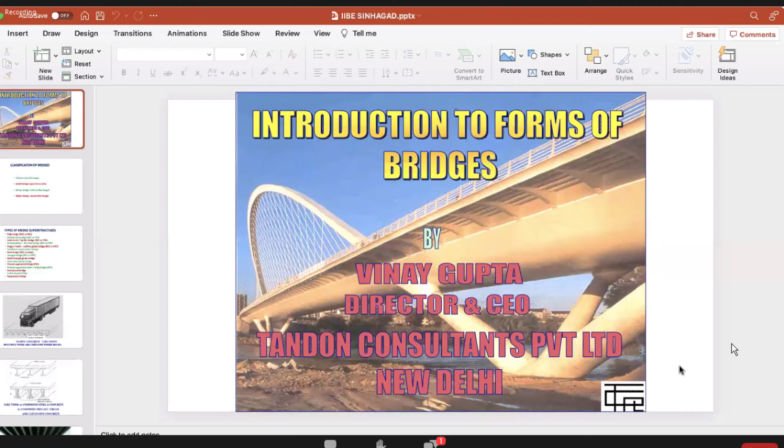To our budding engineers from Sinhagad College and other colleges, the faculty, and other audience today, let me tell you that bridges have one level of difference compared to buildings, in that bridges are always in public limelight. They are infrastructure projects. We have to be more sure about correctness and accuracy, especially when designing bridges, because if anything goes wrong, it is the public at large that is affected. And if something is very nice, it is you who get the appreciation from the politicians, the public, and everybody. So you always see the good side and the bad side of it.

The basic difference between bridges and buildings is that in buildings we may have 1,000 beams, but in a bridge we may have only one beam. In that one beam of a bridge, we go into lots and lots of detail, including creep, shrinkage, expansions, contractions. All those things may not be so carefully or so much in detail analyzed in buildings, where we have hundreds of thousands of beams and slabs. So there is some difference, as we go into a lot more intricacy when it comes to bridges.

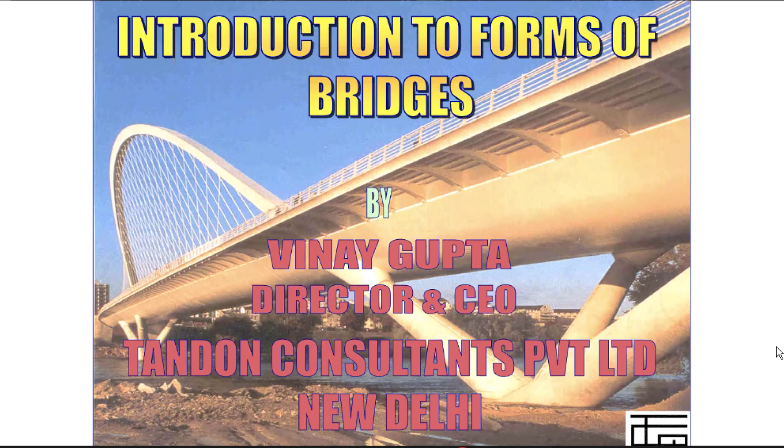All right, so first friends, let us see the basic classification of bridges as per Indian Roads Congress codes. Culverts have a span up to 6 meters. Small bridges have a span from 6 to 12 meters. Minor bridges are found when the length of the bridge is 12 to 60 meters, and major bridges are above 60 meters of total length.

The spans may be smaller. In fact, in the small bridges also, it is the length which is the criteria, not really the span. From 6 to 12 meters of length of the bridge will be called a small bridge.

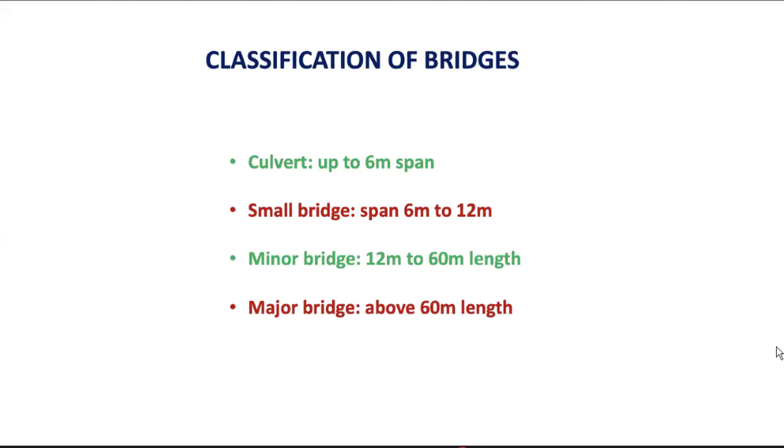Okay, what are the basic types of bridge superstructures these days, meaning as of now, latest? In the past, not so common now, but we do have some slab bridges, which are RCC or PSC slab, like a solid slab as in a building. You have a slab which may span from, let's say, 5 to 10 meters in the case of RCC, maybe 10 to 15 meters in the case of pre-stressed concrete. But somebody may wonder why not more than that.

You can have more than that, but the cost goes up. Material quantities increase heavily. Earthquake forces also increase because the inertial mass increases. So it's because of those practical reasons that we go for a solid slab only for spans between about 5 meters to 15 meters, RCC or pre-stressed concrete.

PSC means pre-stressed concrete. If we have spans larger than that, and if we still want a neat and clean looking slab, then we will go for something called a voided slab superstructure, which may be reinforced concrete or pre-stressed concrete. We will see some pictures of all these.

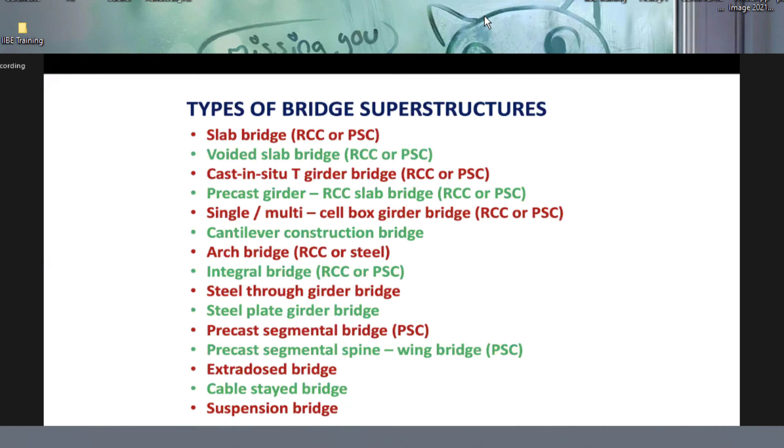If we have larger spans than 15 or 20 meters, then we can go for a cast-in-situ T-girder bridge. Cast-in-situ is one category, where you really put a shutter and cast it, which may have RCC T-beams or pre-stressed concrete T-beam slabs together.

Alternatively, it can be a precast girder topped with an RCC slab deck. The precast beam may be in RCC or pre-stressed concrete, but the slab will typically be in reinforced concrete, RCC.

We can have single or multi-cell box girder bridges, which again can be in RCC or PSC. We can have a cantilever construction bridge where we cannot put shuttering and the spans are large. So when shuttering cannot be placed and the span is large, we use cantilever construction. We will see some pictures as to how they are built up and constructed.

If you're an aesthetic lover, then we can have arch bridges for larger spans especially - they look very good, and can be in reinforced concrete or steel. We may have integral bridges. Integral means it is something like a building frame, where the superstructure is monolithically connected to the bridge without any pier cap and bearings. That becomes an integral bridge, which can also be RCC or PSC.

We can have a steel through girder bridge, like a truss bridge, which is an all open web structure, or we can have a steel plate girder bridge, which is a solid plate having a top flange, bottom flange, and a plate with stiffeners, etc.

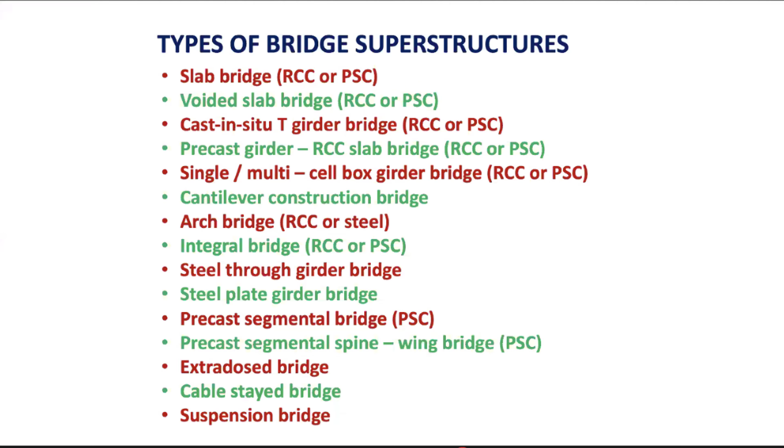We can have extradosed bridges. Here we talk of cable supported bridges, and in cable supported bridges there are three categories: one is extradosed, other is cable stayed, which you mostly hear of, and third is suspension bridge for larger and larger spans. In terms of span range, extradosed bridge is good for about 50 to 200 meters. Cable stayed bridge is good for about 200 meters to 1000 or 1200 meters. Suspension bridge is good for anywhere around 500 meters to 2000 meters span. And today we have a bridge with a clear span of 2 kilometers, or 2000 meters.

So this is a simple cast-in-situ T-section bridge. If you remove the webs from here, it becomes a slab bridge.

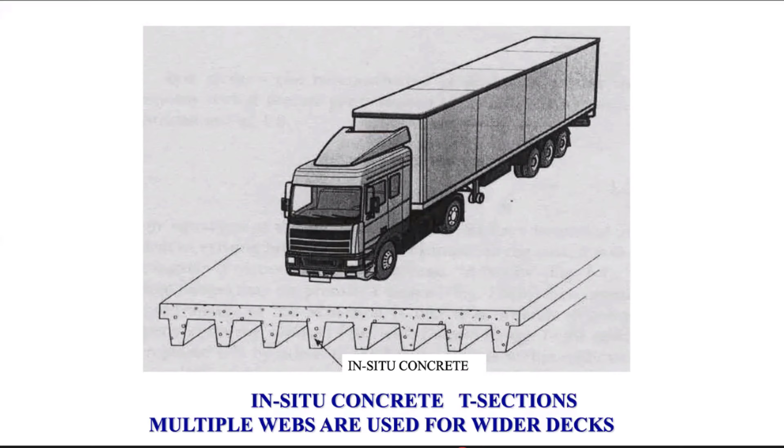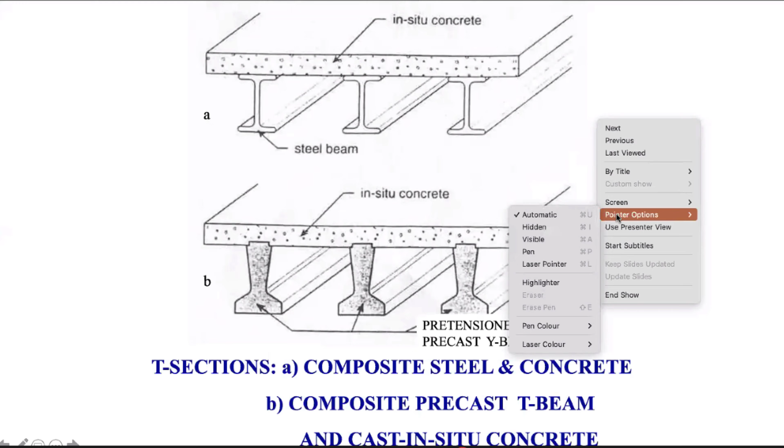This is precast concrete below. If you see below, it's precast pre-stressed concrete beams, topped with an in-situ deck slab, as I said, always an in-situ deck slab. And this is a steel beam bridge where you have I-girders or plate girders topped with an RCC deck slab.

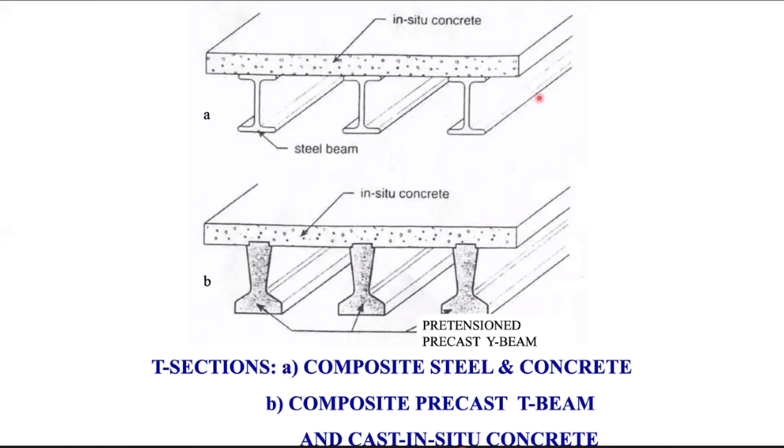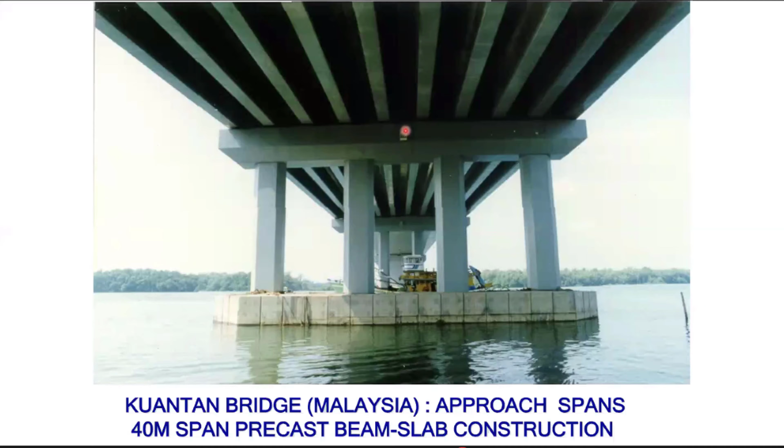So this is just a picture of a 40 meter span bridge wherein the pre-stressed girders are at a spacing of 2 meters transversely, and longitudinally they have a span which is each one 40 meters in the base here.

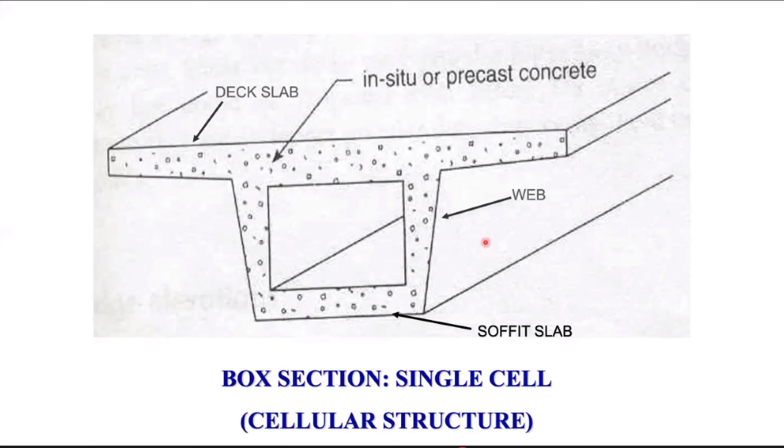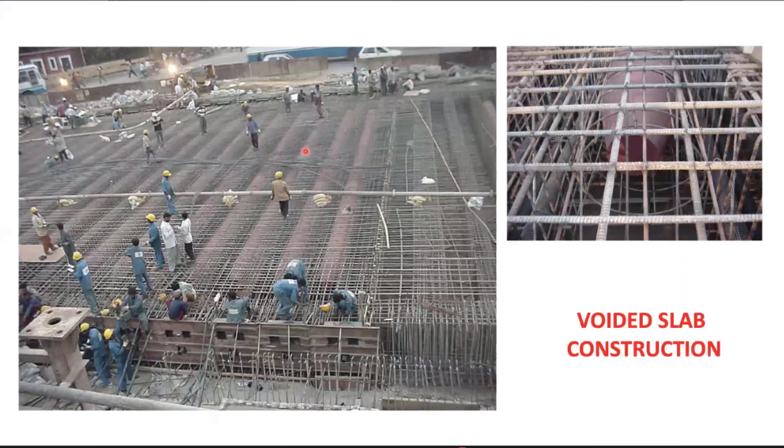Now we have a voided slab. In a voided slab, what happens is very similar to a solid slab or whatever shape we choose - for aesthetics we choose a lip shape - and we create holes like this to reduce the concrete quantity and the weight of the structure with the help of something called void formers. These are the void formers: metallic pipe type of things sealed at the ends like this, and they are placed in the concrete shuttering after placing the reinforcement and other things, and held tight with the help of some anchors so that they don't float when the concrete is wet, because concrete exerts a hydrostatic pressure. Once we do all this, pour the concrete, pre-stress if there's pre-stressing, or just RCC, whatever it is, it becomes a lighter structure by approximately 20% of weight for the given depth.

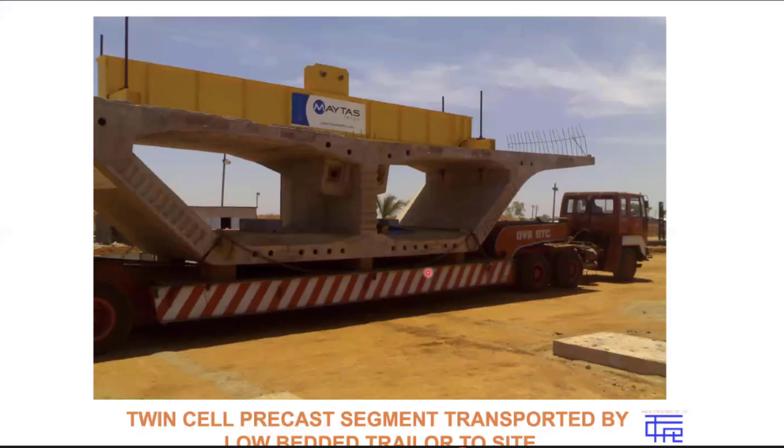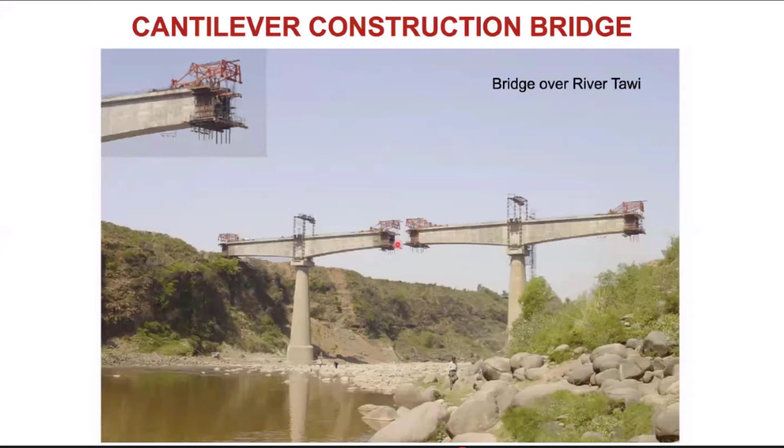Thereafter, we erect this kind of a formwork traveler, one on the right side, one on the left side, for a cantilever construction. With that formwork traveler, we cast in situ or precast, whatever we do, one segment of normally about 3 meters, slightly more or slightly less. Then we pre-stress it. Thereafter, we cast the next segment by moving the formwork traveler away from the center, and we do the pre-stressing at every stage. Once it reaches the center, we put a hanging shutter, put reinforcement, pour concrete, and the job is done.

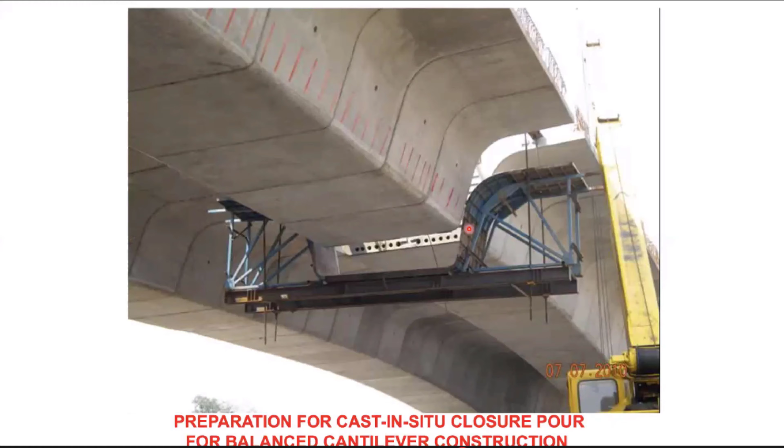Now, about the arch, if you have studied this in your colleges, you will know that an arch takes the vertical loads through a flow process of forces or the stresses as membrane forces. Membrane means it forms two components of the vertical load, along the arch and perpendicular to it, and they start getting balanced with each other. So finally, what is left over in the arch rib is only compression, axial compression. As a result, the arch becomes lighter, cheaper, and of course aesthetic at the same time.

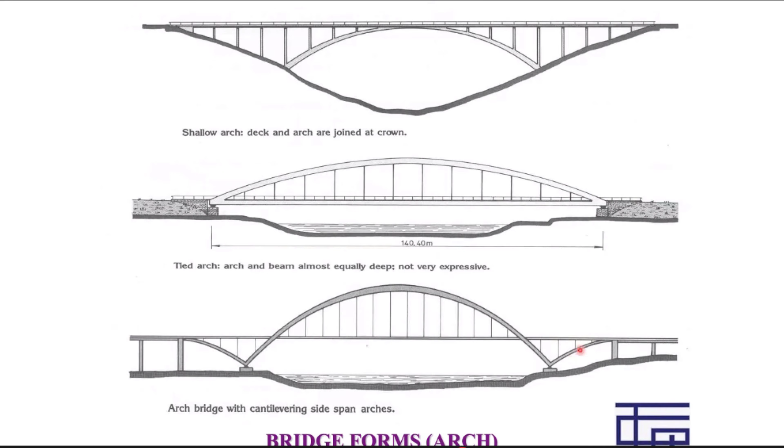This is a structure on the border between Singapore and Malaysia, a series of arches. What they have done is made the central arch large in span, and as you go towards the shore, with 20 to 30 arches, it goes on reducing in span. I know the designers have to work harder to design so many spans of different lengths, but the advantage is aesthetic. It looks very nice to have varying span lengths, lesser towards the shore and more towards the middle.

This is an arch bridge that we designed and was constructed by a contractor in Himachal Pradesh, with a span of 120 meters. It has a deck hanging from the arch, and this river is so turbulent that no shuttering could be placed. So this entire arch was constructed by the cantilever construction method from either side. Once the arch was completed, permanent suspenders were put to suspend the shutter, then the concrete was cast and the shutter removed. The suspenders remain.

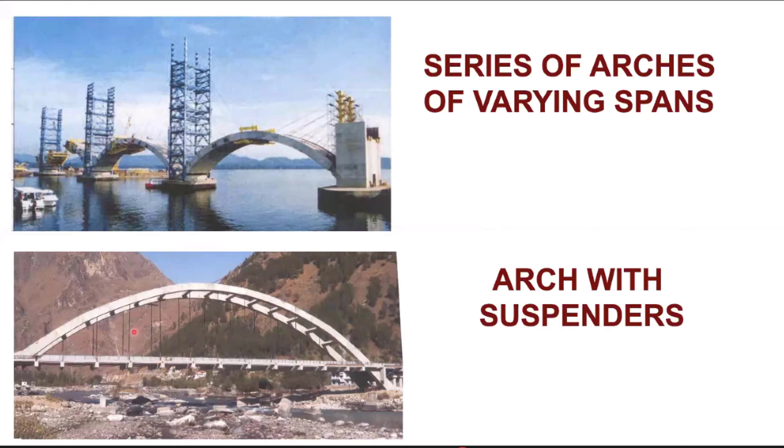Look at this very aesthetic masterpiece. It's a bridge in UK, the Gateshead Millennium Bridge, over the River Tyne, with a span of 105 meters. It has been designed and constructed such that the entire manufacturing of this arch, with a total weight of 800 tons of steel, was done off the shore somewhere else. The entire thing was brought on barges, on a barge of 3,200 ton capacity, to this place and fixed with the help of hydraulic pivots at each of the ends.

The advantage is that with hydraulic pivots, when ships have to pass, they lift the arch up, and when the ships have gone, they drop it back and pedestrians can move again. And of course, it looks excellent. During the night, it looked like a necklace of a princess with the lights reflecting from the water.

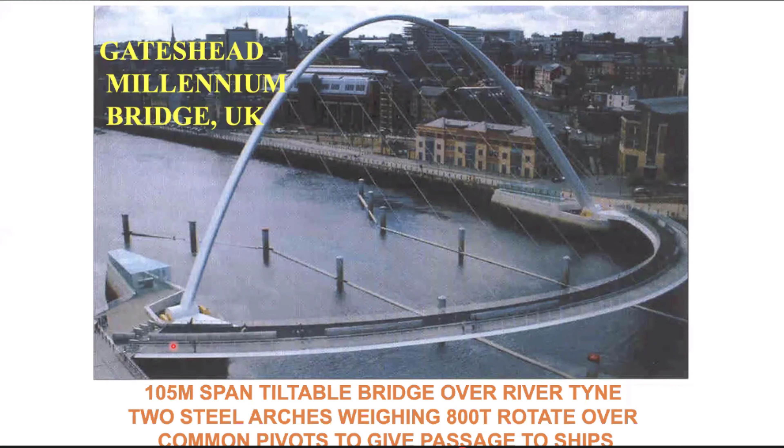Now we come to another form that we discussed, integral bridge. This is actually Kuala Lumpur International Airport, which we designed this bridge for a long time back. If you have a structure which is curved like this, and if you put this structure on two bearings transversely, then the structure being so sharply curved, it will fail in stability. If it topples, bearings will go into tension. So to avoid that, we have made these piers integral to the structure without any pier cap and bearing. It looks aesthetically also good. It avoids bearings, which are sometimes a source of problems, and it becomes stable as we want it to be. And this is a ramp, through which you go to the airport before you alight your car.

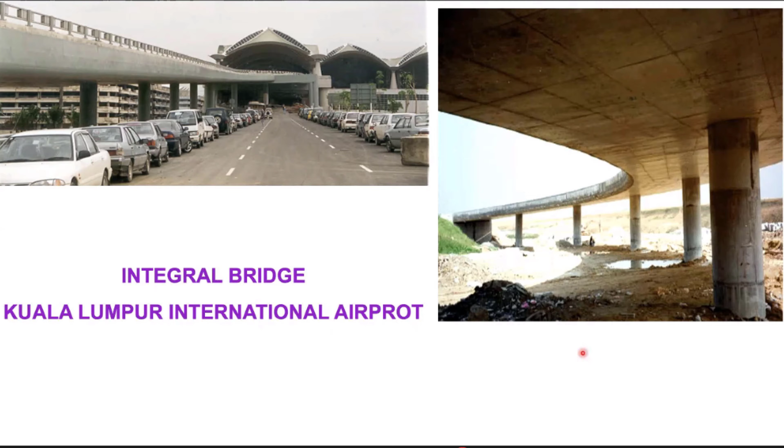Look at another interesting integral bridge. Now in this case, the piers, let's say if it's a single pier, is not at 90 degrees, it is at 20 degrees. So the pier is almost in the direction of the bridge, just missing it by 20 degrees. The skew, as we call it, is 70 degrees as opposed to 0. Now in these cases, when a bridge rests on the pier and bearings, it will have the tendency of lifting up, not toppling fully, but lifting up and creating problems with the bearing forces going negative. And other bearings will have excessive vertical load because of this balancing out situation. So we have made it integral with the help of multiple piers, 5 numbers of piers at each pier location, because the skew was a must due to traffic reasons.

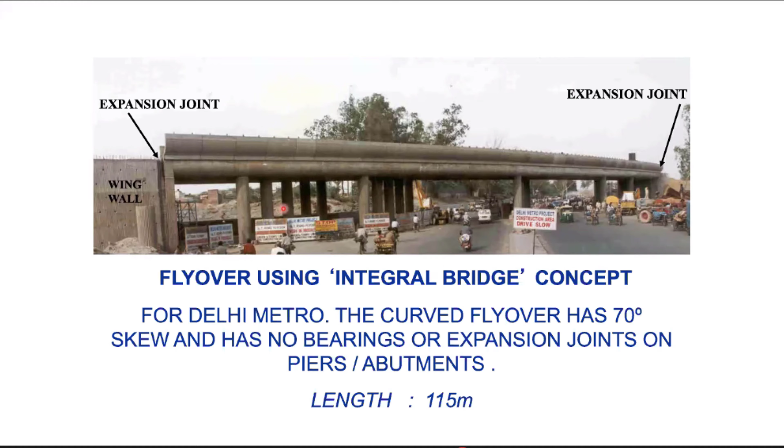Another thing we discussed is the steel through girder bridge. That means an open web bridge or a truss kind of bridge. This is the shape of a truss kind of bridge, very similar to what you design as trusses in your colleges for buildings etc. Sometimes we design even Vierendeel girders. This is not a Vierendeel girder, but it is a truss bridge. It can have a large depth, nearly about 1/10th or 1/12th or 1/15th of the span. Then you have bracings to take the shear.

Otherwise, you have a steel plate girder. In the steel plate girder, you have a solid plate with stiffeners, bottom flange, top flange, and on top of that you put a concrete slab which acts as a deck slab. Now the advantage is that this looks neater, cleaner, and better aesthetically, but it also cannot take too big spans. A truss girder could take even a span of 200 meters, but a steel plate girder will not be able to be designed for more than 50, 60, 70 or 80 meters. That's about the maximum. Beyond that, it becomes too expensive, too bulky, too wild.

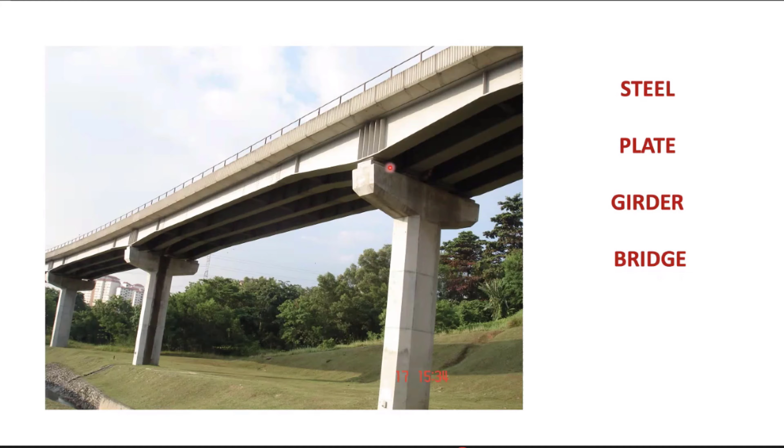All right, now we talk of precast segmental bridges. This is what we see day in and day out in our practical lives when we pass through the cities, for metro construction, for flyovers and all that. In your Pune also you have several of them. Mr. Lema is in charge of several precast segmental railway bridges, metro bridges.

So in precast segmental construction, what happens is that we cast concrete segments in a casting yard. In the process, the quality is also better because we have better control in the casting yard. It's like a factory in a way, producing the concrete segments for you. Then we bring those segments and assemble them for each span at a time. Assembly can be in two ways. One is underslung assembly, wherein you have a launching girder which is below and segments come on top of it, as you see in the right side picture. Here a portal lifts a segment from the railway trailer, places it on the launching girder, lifts the next one, places it, and assembles all the segments. After that, we apply epoxy resin, which is like epoxy glue, araldite type of thing, more like araldite only, and then you put some prestressing, etc.

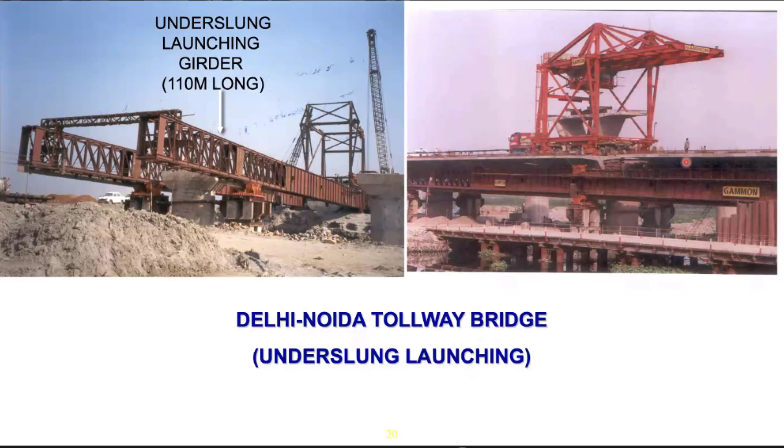The other method is to go for overhead assembly. In overhead, you have an overhead launching girder, and with this launching girder you suspend the segments with the help of wire ropes. You suspend the segments of a span. Thereafter, you do the same process of epoxy again in place.

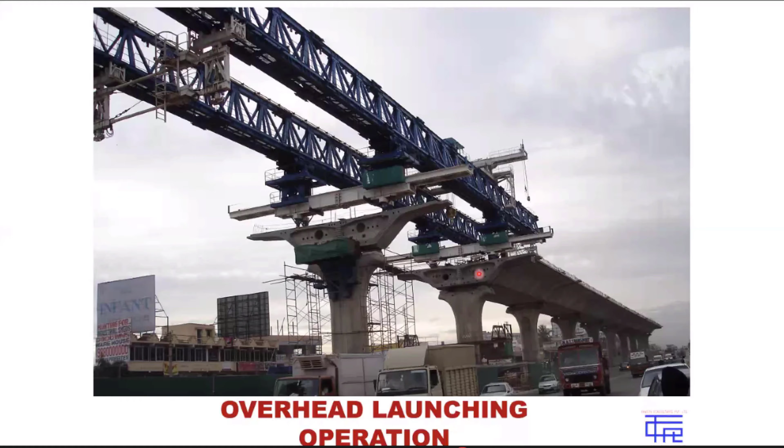This is one picture taken from a DMRC project done about 15, 17 years ago. It uses an overhead launching system because it's segmental - you see the joints every now and then. Each segment is about 2.5 to 3 meters long in this case, and at the joint, epoxy resin is applied.

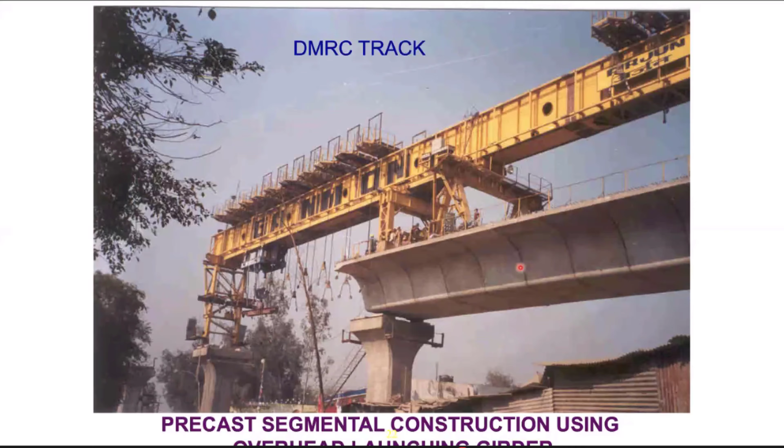Now an enhanced form of precast segmental construction even has transversely precast segments. The problem they had was that the width of the road amidst the traffic running there is not enough to handle a 16-meter wide segment, 3 meters long, traveling on those roads from casting yard to the actual site. So they decided to limit the width of the segment to only as much as the spine. After all the spine segments, 3 meters each, are placed pier to pier and pre-stressed, they bring in these transverse pieces - wings, as we call it - the spine-wing construction. These wings are brought in through cranes, and after applying concrete stitch or epoxy stitch, a transverse pre-stress is applied for it to become one.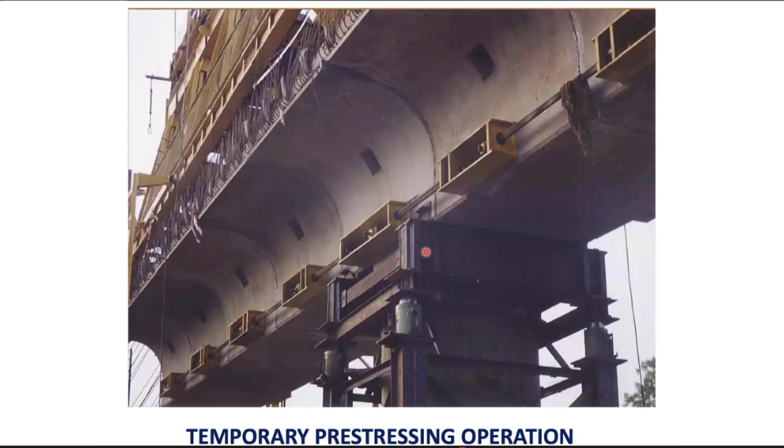Once you've applied the epoxy, you first apply a temporary pre-stress in such a way that it gives a more or less constant compressive stress across the joint of about 0.3 MPa, and keep it for 24 hours with the help of these kinds of systems. Thereafter, you apply the internal permanent pre-stress, which may be as high as 30, 40, or 50 times that 0.3 MPa, and remove the temporary pre-stressing arrangements at that stage.

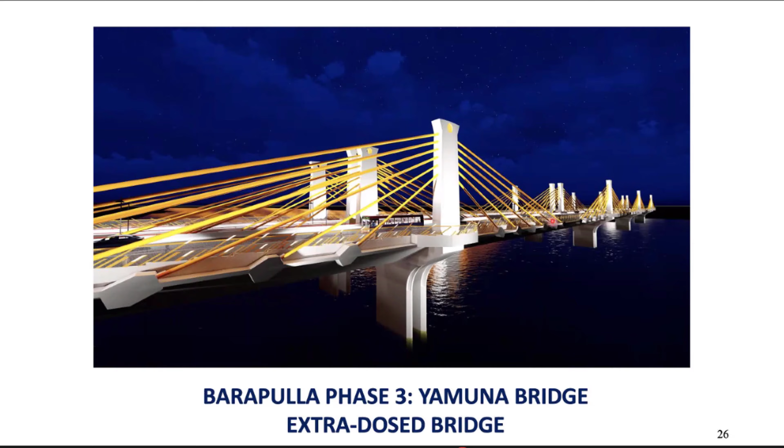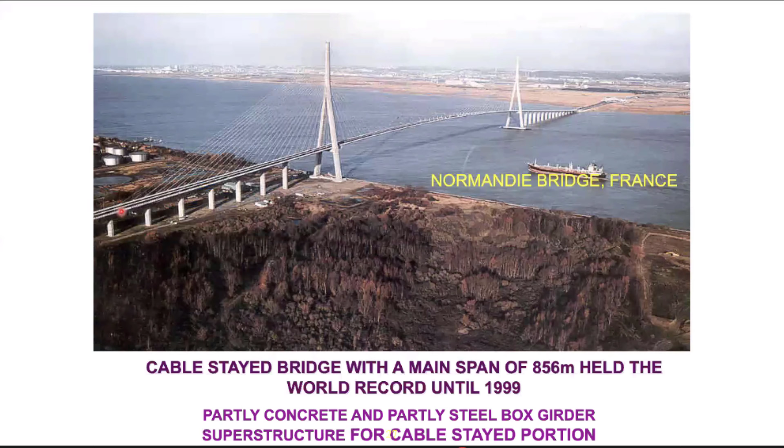How it is constructed is very simple - it's a cantilever construction where you first construct the pylon on the foundations. You then place one segment - if precast, then precast; if steel, then steel; if in situ, then in situ using a forward traveler. Place one segment, put the cable, place another segment, put the cable symmetrically on the other side also. You can do simultaneous construction of the other pylon till such time it meets, and there you put the central closure.

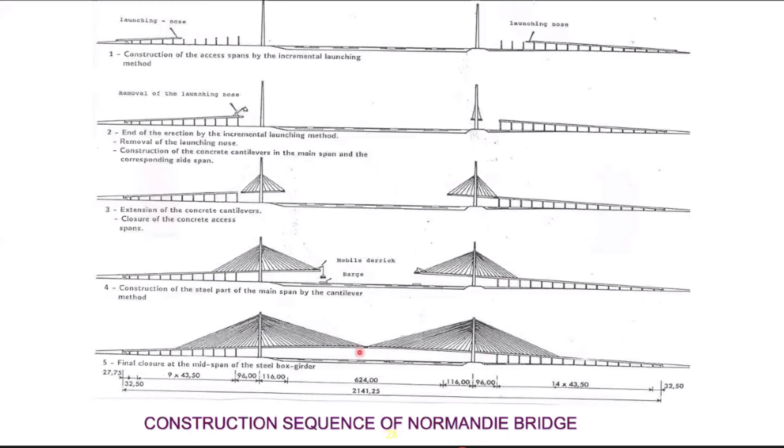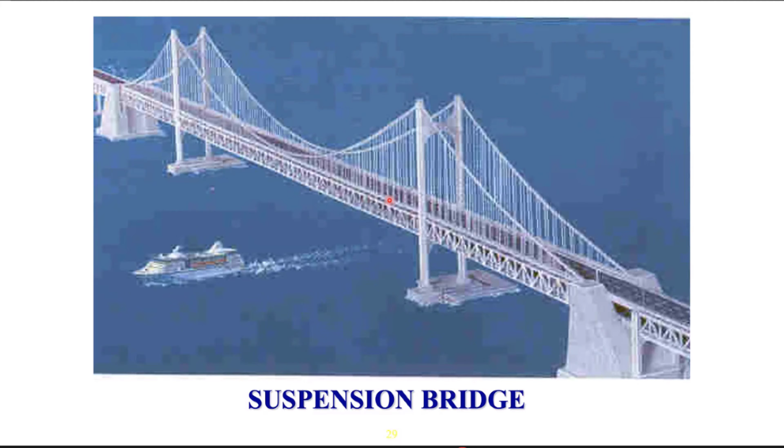This is an example of that bridge, which still holds the world record. It was constructed in 1999. It has a steel deck of 35 meters width, a span of 1991 meters precisely, and 300 meter tall steel pylons. It is in Akashi Strait in Kobe, Japan, called Akashi Kaikyo.

This span is about a kilometer, 2 kilometers, and a kilometer, so it's a 4 kilometer long bridge. The ropes, the cables, are also 4 kilometers in length, and each one has a weight of 40,000 tons.

The big challenge for the constructor was how to carry this cable across the seabed in the strait - strait meaning a narrow, somewhat shallow stream of water in the sea. A combined power of high capacity helicopters and high capacity barges working in the sea and above pulled these cables from one end to the other across the seabed, and that's how they managed to pull the 40,000 tons of weight.

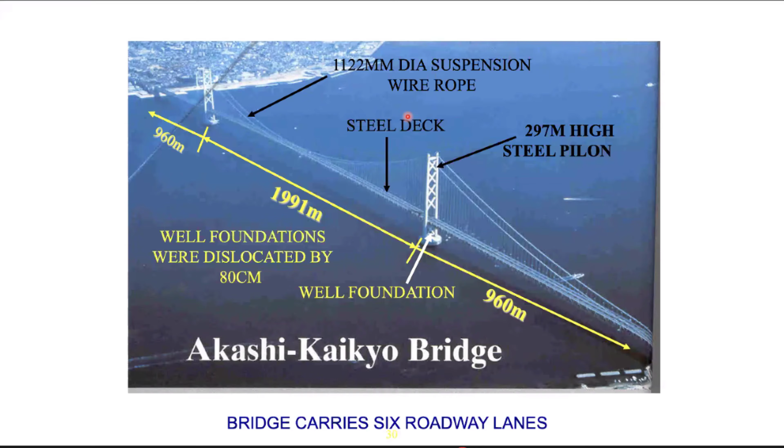Now we have seen superstructures, we go to foundations. We have open or spread footings, which you must have all seen in your colleges. We have pile foundations, which you must have also heard of, and we will see how they look. We also have well foundations, caisson foundations, and micro pile foundations, though these two are not so common in India, but they are also foundation forms. And we have piled raft foundation.

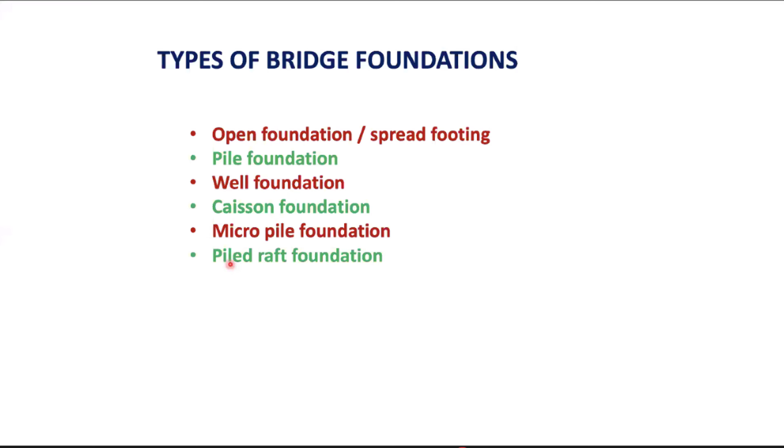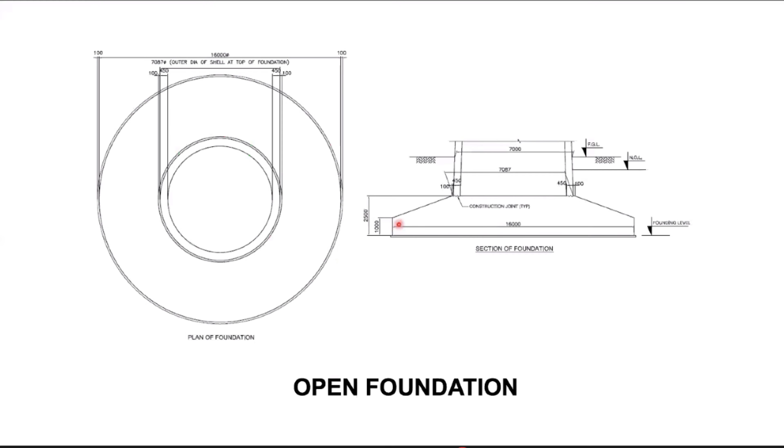Let's go down and see. An open foundation for, say, an annular pier of a bridge can have a shape like this, circular, square, whatever you choose based on economics and design. It may be horizontal here and inclined thereafter to reduce the concrete quantity, giving it a shape like this.

This shape is normally suitable when the width is large. Like in this case, it is for a chimney, where the width is almost 16 meters. In that case, for economics, it makes sense to taper this on both sides.

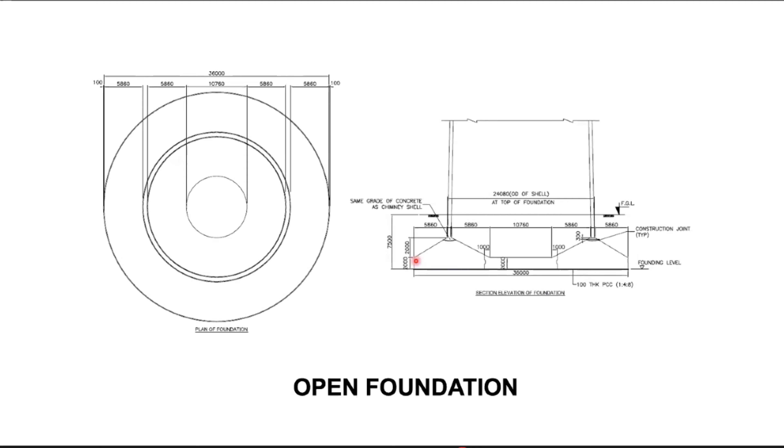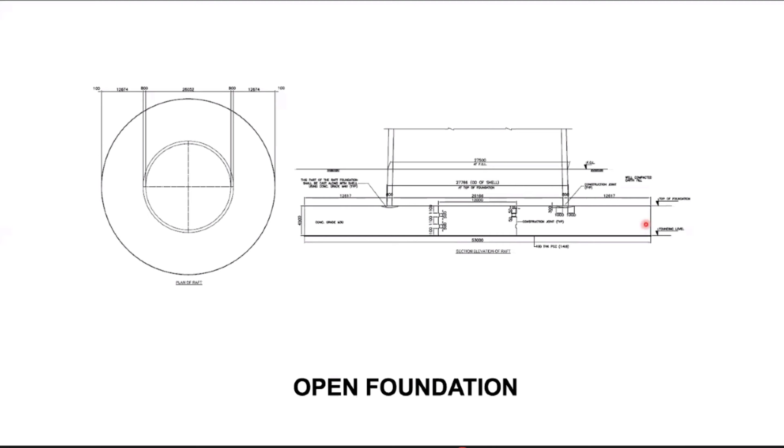There can be another type when you have a small diameter here - although in this case it is not small, it is 27 meters. But if it's a small diameter like 7, 8, or 10 meters, this can well be flat; it doesn't have to be always tapered. By making it flat, the advantage is the maximum thickness reduced and the reinforcement reduced, even though we used a larger quantity of concrete. It turned out cheaper in this case when we did the analysis.

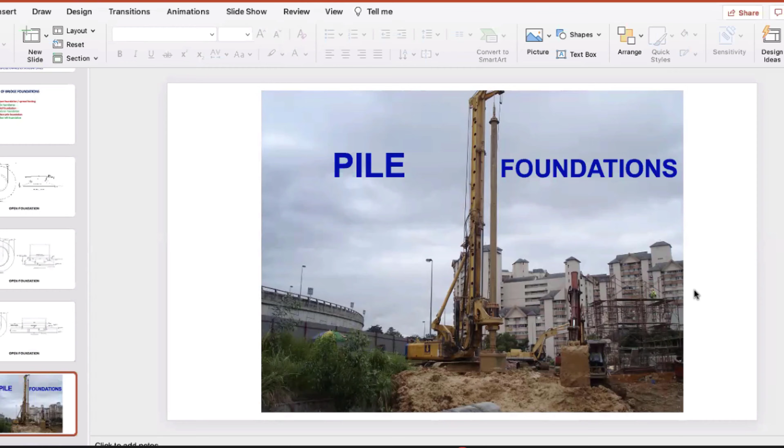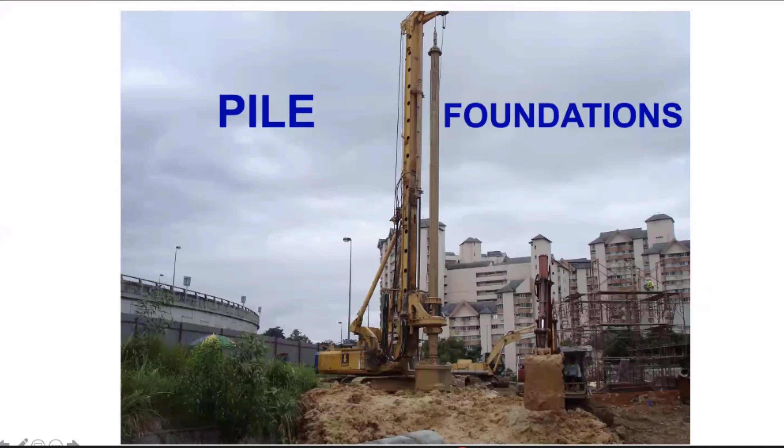In pile foundation, what happens is you have a hydraulic tool. Usually we use a hydraulic tool, which can rotate a shaft into the ground, and through the rotation it excavates the soil and picks it up through a bucket attached to grab the soil out. Likewise, you create a hole in the soil, wherein you have to place the reinforcement like this.

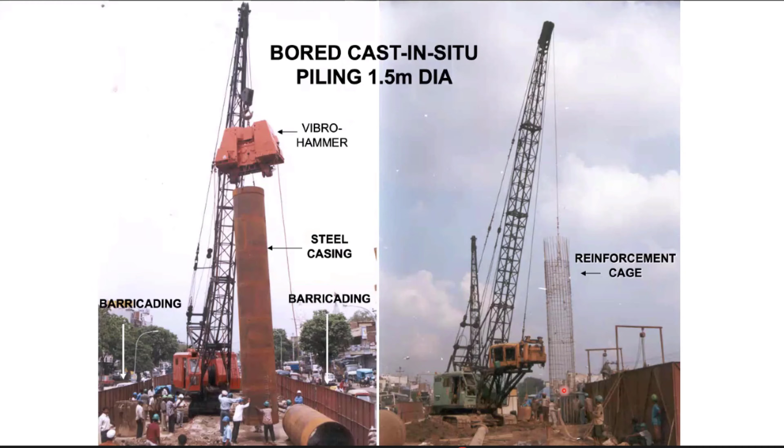You lower the reinforcement, and thereafter you put a tremie - I'll explain what tremie is - and through the tremie you pour concrete. Now this pile goes to 20 meters, 30 meters, 40 meters, 60 meters, even 80 meters in Cochin we have done, and outside people have done 120 meter deep piles also.

They can give you larger capacity from the soil, which may be weaker or whatever, especially when it is not rock - you do it more commonly in that case. But in Pune, Nagpur, and these places, metros are mostly made on piles, while where there's shallower rock up to 6 meters, they go for open foundations on the rock with high bearing capacity.

These piles give capacity through the side bond on the surface, and also from the end bearing. So end bearing and side friction - the side bond between the soil and the concrete - these two give you the capacity of a pile, which is of course higher.

Another concept, a slight refinement of a pile foundation, is the pile raft. In the pile raft, we do a soil-structure interaction analysis, wherein you take the soil as a spring, the pile as a very strong spring, and the raft as a structural member. Finding the interaction of all this, you find that about 20% of the load goes directly from the raft to the soil below, and the remaining 80% to the piles. So it becomes a piled raft foundation in your analysis.

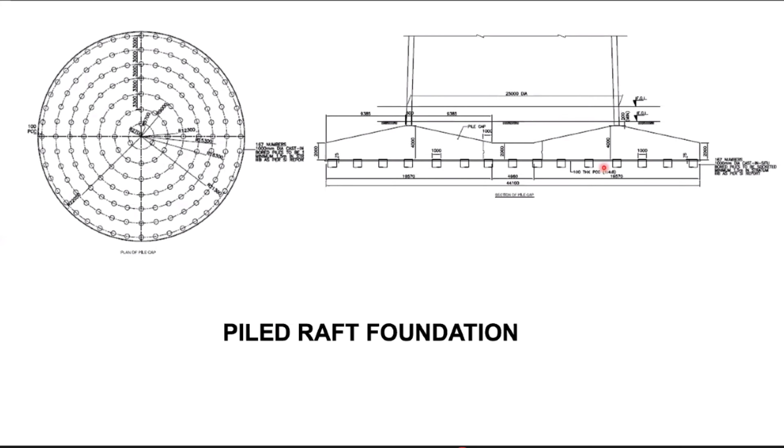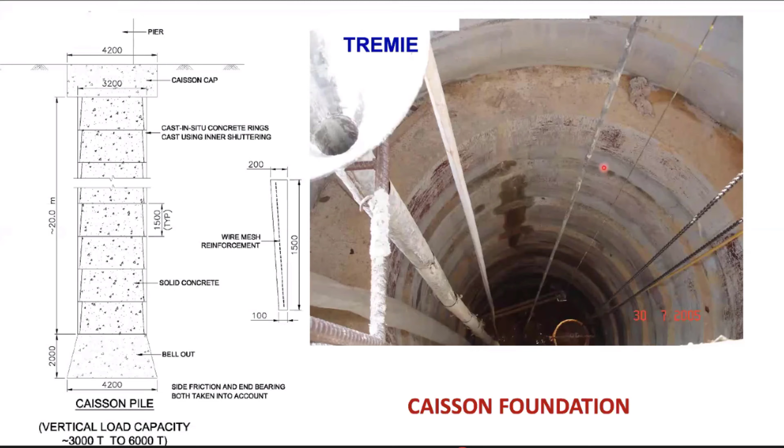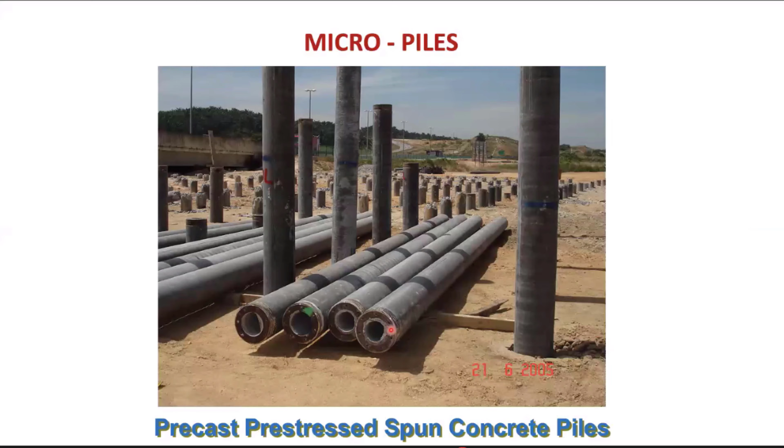We also have the caisson foundation. This technology is used in Malaysia, so I'll probably skip it, since it's not done in India. Then there are micropiles, which are ready-made piles available in 300 millimeter and 600 millimeter diameter. They're usually high-strength, M60, pre-stressed concrete, available in 12-meter long pieces. You bring them in and hammer them down. It's a compaction pile, so it gives you high capacity because you're hammering it down.

The advantage here is that it can take much larger vertical loads, and also, by virtue of having a large Z value—maybe 5, 10, or 15 meters diameter—it takes a lot of horizontal forces and the bending moments created from them, through the side resistance of the soil. So it's like a wide pile foundation that you're inserting into the ground.

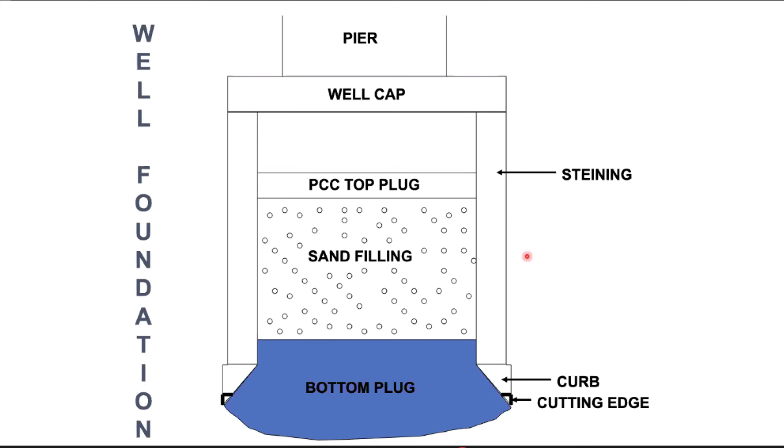This is a picture of the sinking of a well: every time you do some excavation, the well starts sinking, then you cast more steining, then again excavate inside, and the well keeps sinking, likewise.

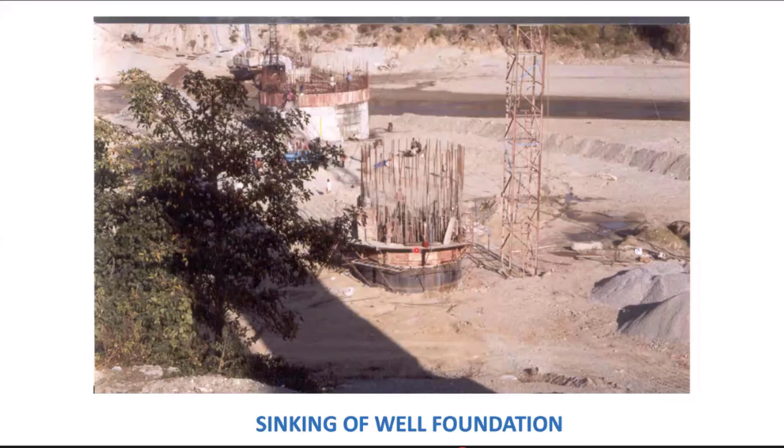Now we go to piers. Piers can be solid, which is what you see in Pune Metro, or annular, rectangular, or hollow. They can be solid or annular circular piers, or any other shape—rectangular, circular, or otherwise.

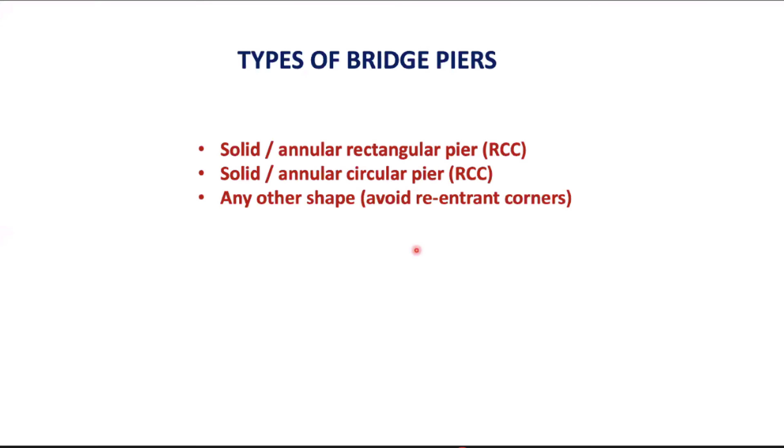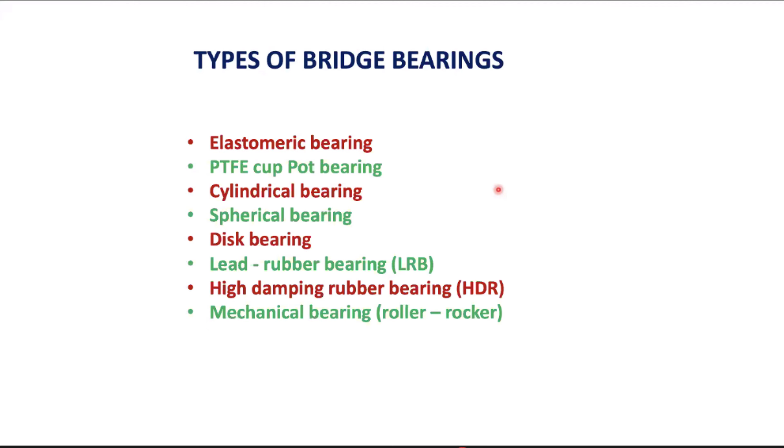Bridge bearings—the elastomeric bearings. Bearings are the elements placed between the superstructure and the pier cap, for the load to be transferred to the foundation finally. We have elastomeric bearings, PTFE cum pot bearings, rubber bearings, and mechanical bearings like roller and rocker, which railways use more.

In elastomeric bearings, you have an elastomer made of chloroprene, carbon black, and a few chemicals put together, forming a sheet. Inside that you have reinforcement of mild steel plates, and you vulcanize the entire thing at this temperature. You'll have the handout, so you can read it later—I may be rushing fast.

It becomes a slightly softer material than the hardest steel, and the elastomeric bearing works very well. It's fairly cheap—the cheapest form of bearing. The only thing is we should manufacture it properly. The next one is the PTFE cum pot bearing, which is very popular nowadays.

In the PTFE cum pot bearing, we have a bottom plate, which is anchored to the pedestals in over the pier cap. We have a top plate, which is anchored to the superstructure. Anchors are not shown. At the bottom of the top plate, which is mild steel, we have the stainless steel plate also there.

Below the stainless, coming onto the side, we have bottom plate and side walls, again circular in plan, and a piston which is also circular, and an elastomeric disc here, which is for transferring the load equally everywhere. Over the piston, there is a plate which is called saddle plate.

In the saddle plate, we have a small recess of 2.5 millimeters. In that recess, we put polytetrafluoroethylene, white material. The sliding between the top and bottom takes place between the PTFE and stainless steel that is here. So stainless steel and this mild steel is connected to superstructure, and this PTFE piston and the bottom one, called cylinder, and the elastomeric disc, are connected to substructure, and the sliding would take place along this mating line.

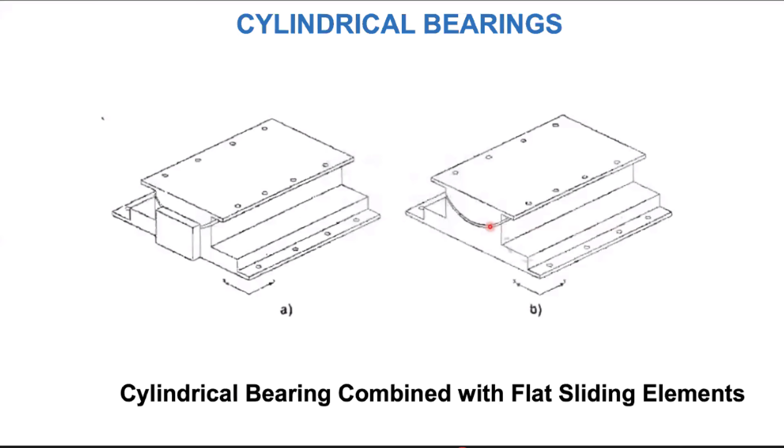And I think Mr. Jitendra Rathore is with us. He must be watching all this.

From Sanfield, there is another type of bearing, that is disc bearing. These bearings were used first time in India for Worli Bandra Sea Link in Mumbai. In this bearing, you have a disc of a material called polyurethane, which is a very high capacity material. For larger loads, this bearing is suitable because this requires a lesser area to transfer the load because it has a high capacity.

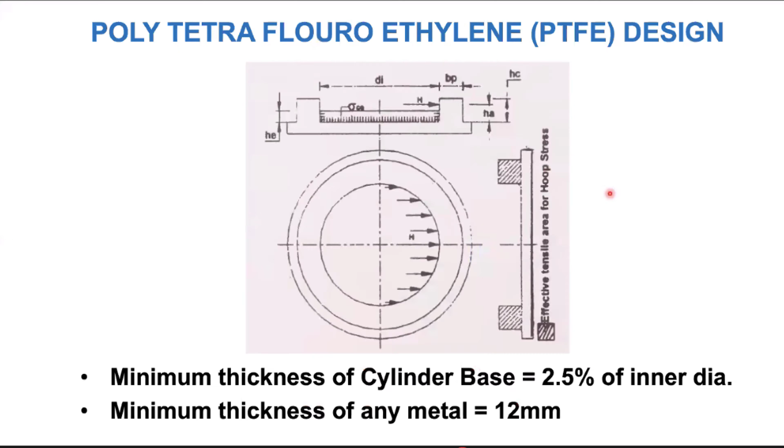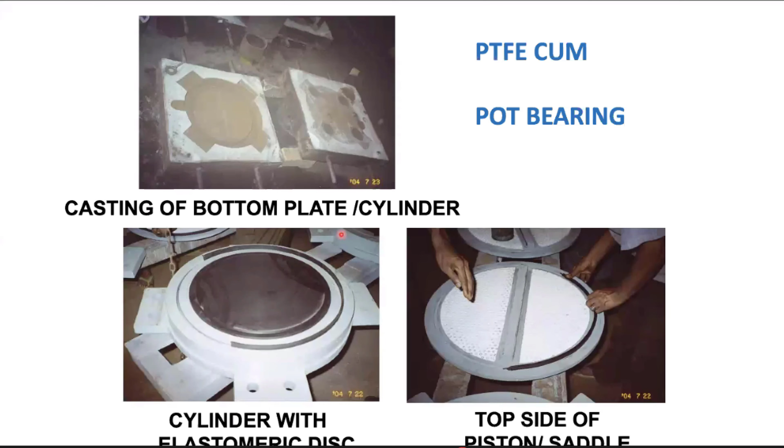In fact, if you go up and see here, elastomeric bearing will take a pressure of about 10 MPa. Pot bearing will take a pressure of about 25 to 30 MPa. And spherical bearing will take a pressure of about 30 to 45, 50 MPa. That is the difference. And this will take even more.

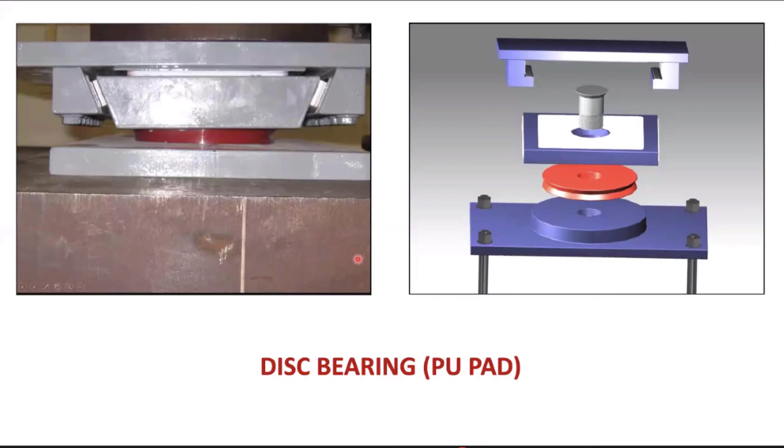I don't know how much. I have not gone into details of what load it can take, but only Bandra Sea Link bridge, being a large one, it is able to take those vertical loads.

So what we do is, we put this kind of high damping rubber as one material, which gives a damping effect and increases the time period of the structure. Or we use low damping rubber with a lead plug, which gives us a larger damping, meaning pushing the structure back to its position. Or we use just elastomeric bearing, which is a low damping material, which gives an enhancement of the natural time period of the structure, thereby reducing the earthquake forces experienced by the structure, even though the structure may be heavy.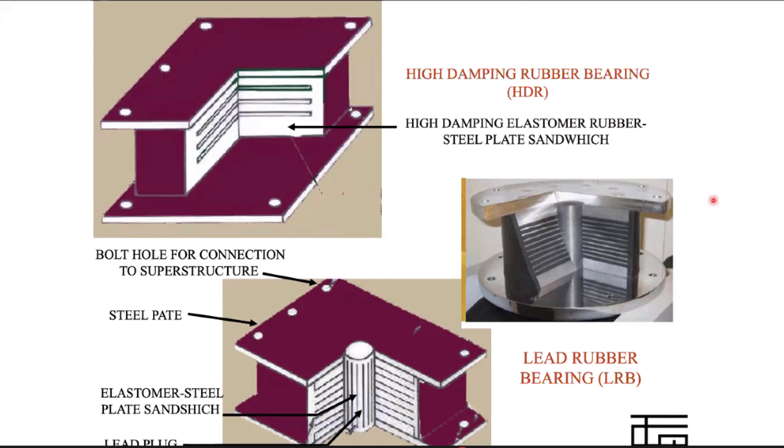Then I talked about mechanical bearings. These are more used in railways, less now in highway bridges. We have rollers, we have a saddle plate, we have a top plate, we have a bottom plate. This is anchored to substructure, this is anchored to superstructure, and this acts by movement.

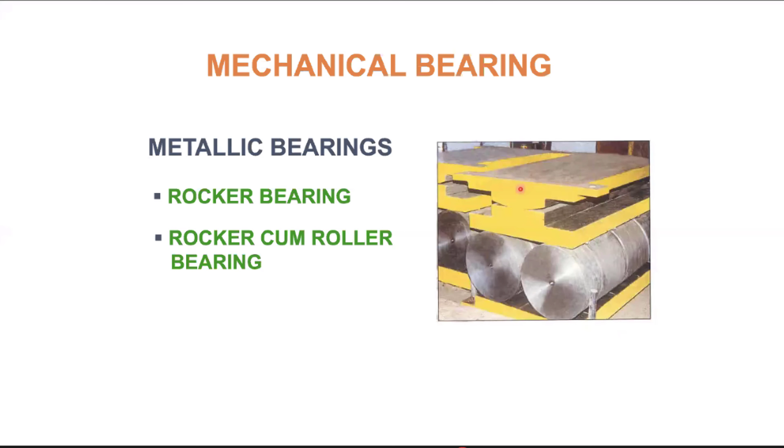Okay, now come to expansion joints. Where you have two adjoining spans provided with the gap, you can't have this gap permanently because you want the traffic to move on a smooth surface. So this expansion joint transits between the two adjoining surfaces of the deck slab of a bridge.

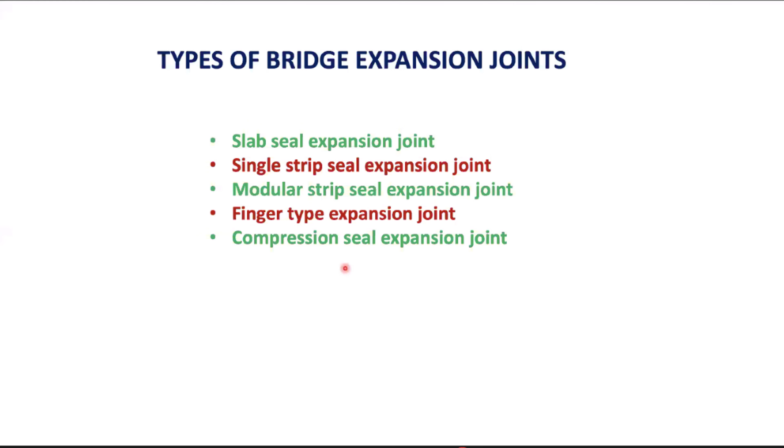So we have slab seal type, single strip seal expansion joint, modular strip seal, finger type, compression seal, and we'll see each one of them. This is the most common expansion joint nowadays, that is strip seal. In this, you have a metallic extrusion of a specific shape.

You have a very simple elastomeric seal like this, which can expand and contract, and at about 5,000 rupees a meter, it can take the loads and transfer the structure's movement.

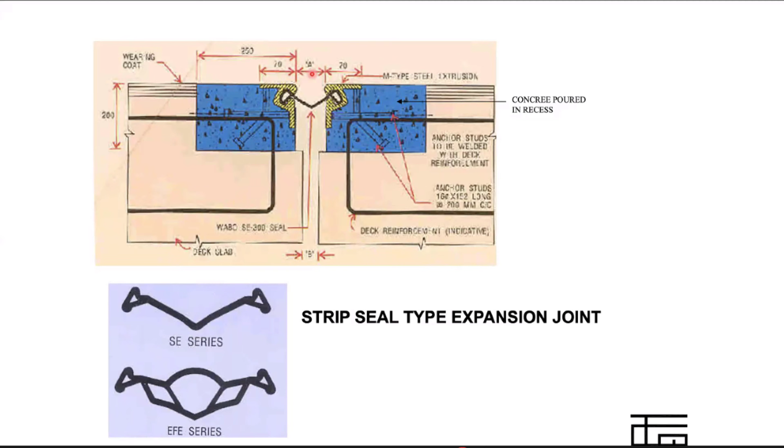When you have a larger movement, the limitation is that this movement, plus and minus together, due to expansion, contraction, temperature, shrinkage, creep etc., if it's up to 80 millimeters, this is fine. Otherwise, you have to go for a modular strip seal, which you can see the shape here.

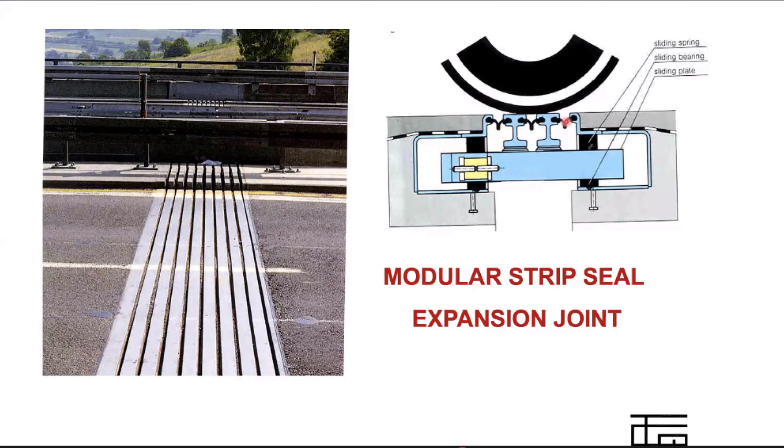Each of them can take 80 millimeters movement, plus and minus added together. So finally, you require a number of them depending on the length of the bridge that has to be bridged.

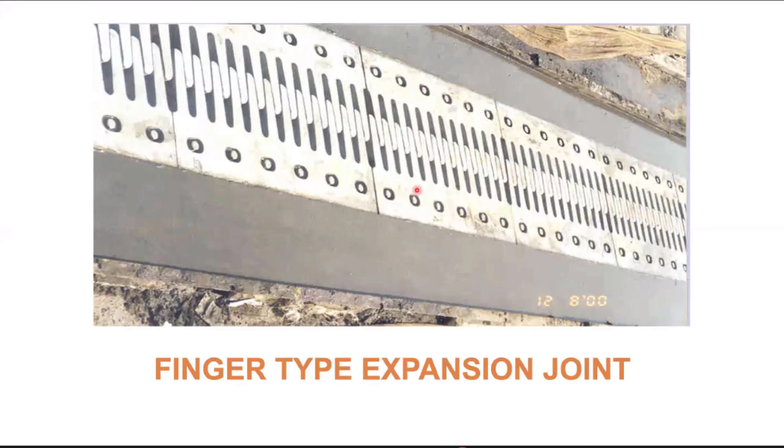In finger type, you have metallic fingers, as the name suggests, and they just bridge the gap so the vehicle can move over it without any problems. But the finger type expansion joint itself, being in metal, is a little prone to corrosion, so we have to worry about those parts in terms of durability.

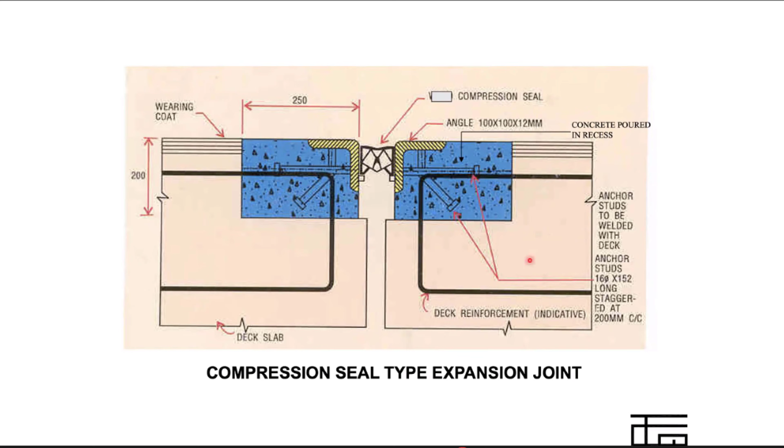We have box seal, or compression seal, wherein we have this kind of elastomeric box which can expand and contract. But looking at the shape itself, we can make out that this can't take very large movements. It can take movements plus and minus together only up to 40 millimeters.

Now we talk of reinforcement and pre-stressing. Reinforcement is passive reinforcement, whereas pre-stressing is active. Let me just check how many slides, because I should not be missing my slide. 60, okay, we have 5 more, fine. So I'll go to this.

In pre-stressing, what happens is you put some kind of metallic cable running along the tensile bending moment profile and stress these cables, locking them to the structure to give compression where we have tension on account of the bending moment.

Let's say if it's a 2-span beam with the supports, you have tension here, so you provide the pre-stressing here. You have tension there, provide the pre-stressing there. You have tension there, provide pre-stressing there.

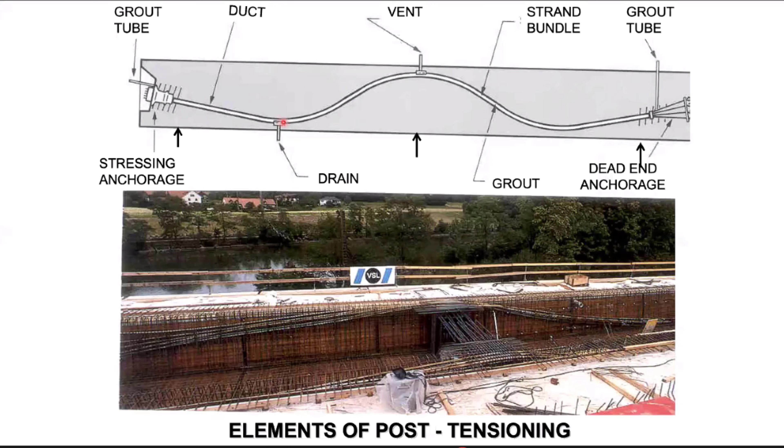But for doing this, we provide ducts that look something like this, metallic ducts or plastic ducts made of high-density polyethylene. In the ducts, we place pre-stressing hardware. Hardware means, first of all, we have the duct, which is placed in the concrete while casting, and after that, we bring in these pre-stressing strands.

Now here, you see, this is something called a cone, an anchorage cone, which looks something like this, and this is also placed till here where the concrete line is. After that, you put the pre-stressing cables.

Then you put the anchor head, which has conical holes. In the conical holes, we place conical wedges. These wedges have serrations inside, like teeth, so that once we have stressed a cable and hammered these wedges, they start biting onto the strand to make sure it doesn't go back inside, and they hold the force onto the concrete.

After that, we grout all this with cement so that it's permanently done and also protected against corrosion. Now, as regards strands, strands comprise 7 wires - a central wire and 6 outer wires - and this becomes one strand.

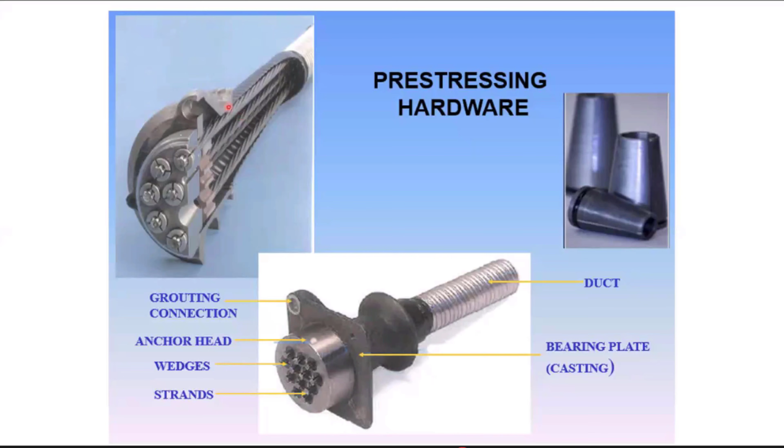And when we have a number of strands put together, it becomes a cable like that. So this is one more picture, I'll probably skip this - this is how it looks.

Now, pre-stressing gives a reduced span to depth ratio and reduced deflections because cracking is avoided. You have compression generated by the pre-stress, enhanced serviceability, therefore more durable and long-lasting concrete, and reduced construction time because once you pre-stress after 3-4 days, you can move your shutter in the case of cast in situ. You don't have to wait for 15 or 21 days, unlike a large span cast in situ RCC. And enhanced aesthetics because you have a slender structure due to pre-stressing.

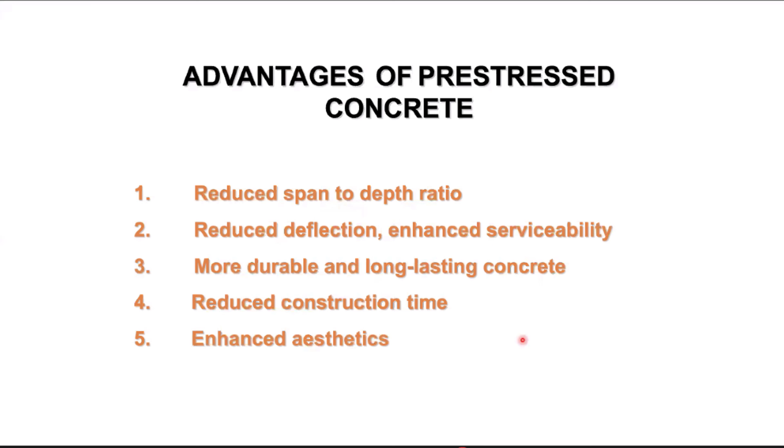Okay, 1 or 2 more slides, on aesthetics. Now, nowadays, since bridges or flyovers are in the public limelight, in urban areas, we also want to see something aesthetically pleasing. A lot of thrust is going into making the structures pleasing.

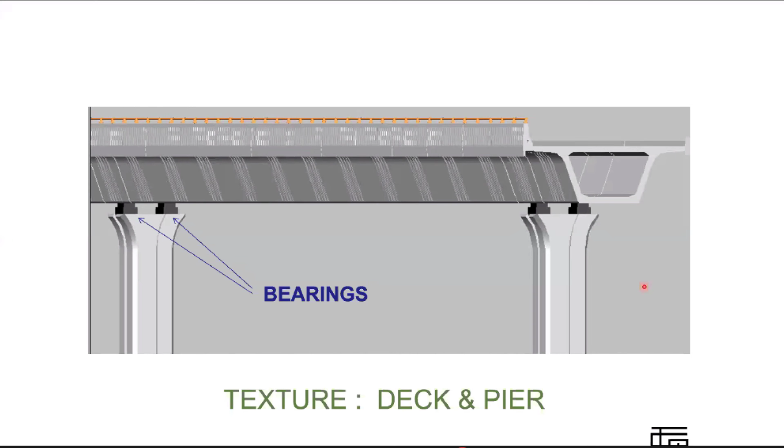So if you look at this expressway, which is going from Bangalore to Silk Board Junction to Electronic City, 10 kilometers long, there we have provided a rubber liner in the shutter while casting the precast segments to give this kind of interesting shape to the segments. So when you see from below, you will see a better shape compared to just plain concrete.